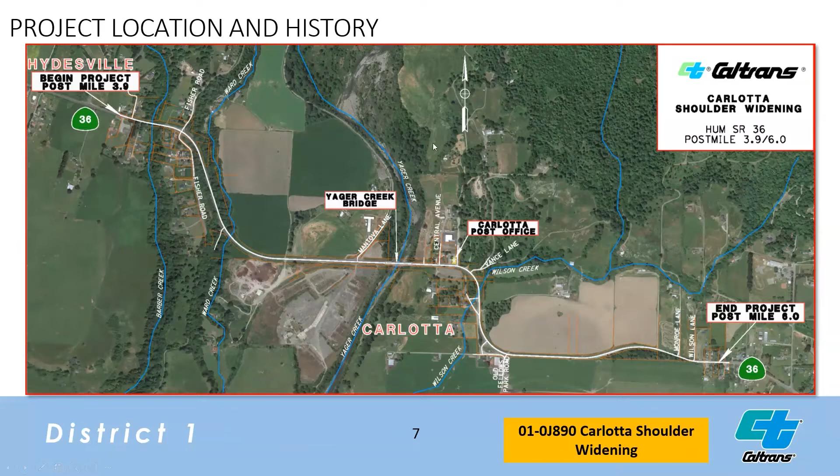Now, this project was initiated as a response to a traffic investigation report that was sent by headquarters in Sacramento, Caltrans, and we monitor all roads through the state of California. This segment of highway was identified as having a higher rate of collisions than the statewide average. So this came up, flagged our report, and we go to our traffic safety folks here in Eureka, and we go out and investigate this. So this was an investigation report.

The purpose of our project is to reduce the frequency and severity of collisions. This is more of a proactive approach. Historically, Caltrans has been in the safety world a little bit more reactive, but we are looking at things and projecting what we think will happen. So we are trying to save lives and go to zero fatalities with our mission.

Right now, our program construction cost for all what we present is about $16 million. If you can please go ahead.

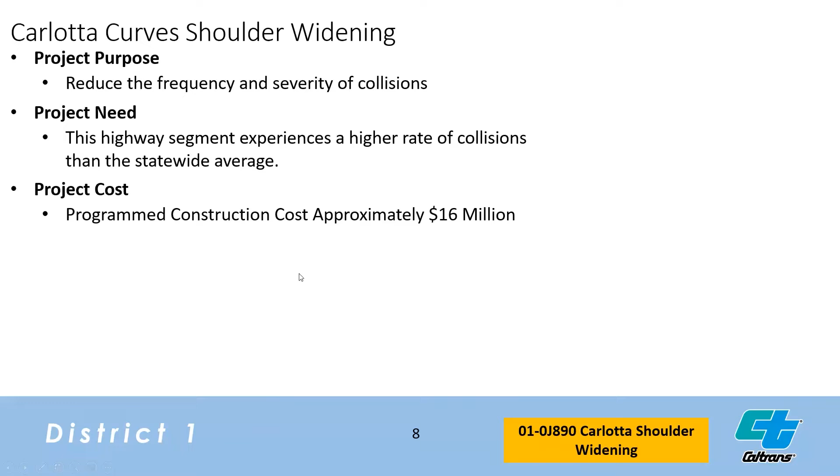So this is where we're at. We are in September of 2022. We are somewhere kind of almost at the midpoint of our studies. So we have some preliminary concepts of design, what we want to do to make this corridor safer. We are looking at having to do the required environmental studies. So we're there, and we are here to present our concept to the community.

We live, and we want to make sure that we hear your voice and get your comments. We basically modify our designs a lot of times based on what a community comment is, because you know best, because you are the users of the facility.

Our end of environmental phase for the complete final document and final project report, which is where we decide this is what we're going to do, is going to be next spring, in 2023. We hope to start construction in summer of 2024, and it's going to be a 2-season job ending December 2026, most of it your standard construction. We will go through that a little bit. Right now, it's still in the development phase.

If you can move to the next slide. Okay, I'd like to introduce Brian Simon, who's our branch chief. What we're going to do is have him and Desiree do the presentation on what the design elements are, and then we'll go to the next folks. So thank you, I will turn it over to you.

Thanks, Marie. Can you guys hear me okay? Can you hear Marie speak over here? We can move the chairs closer if you guys want to get closer. Desiree's going to be doing some more speaking as well, doing kind of an overview of the project.

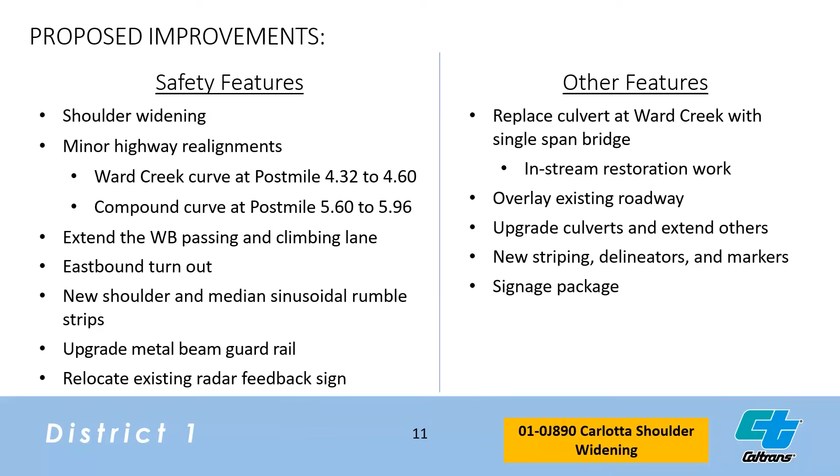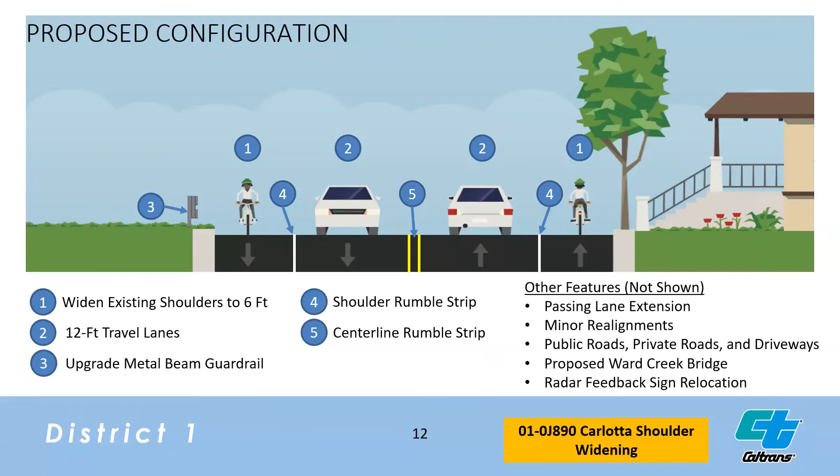We will be doing the 6 feet shoulders. We'll have 12 feet driving lanes, the upgrading of the metal beam guardrail, and where the rumble strips will be located at. Here's an overview of the map, but instead it's now divided into 8 sheets.

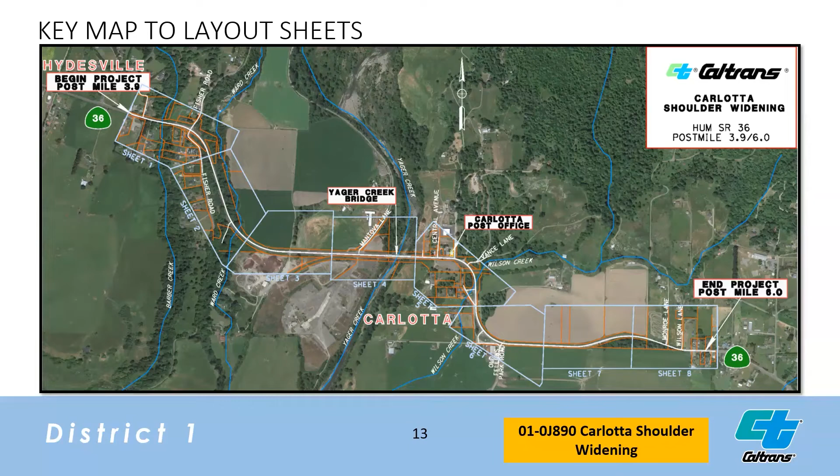I'm going to go fairly quickly through each of these 8 sheets on the upcoming slides. These sheets will show the preliminary proposed design, safety features such as widening, overlay, guardrail, and rumble strip locations, which are all subject to change as design fine-tunes our proposed design that we have here. Please note which sheet numbers you may be interested in, as these slides will be available to look at during the questioning and answering part of our presentation.

Here we are on sheet 1, and I just want to note the legend that you're seeing on the left. There are going to be 5 features that will pop up on the screen. It won't be super noticeable, but I'll try to go slow enough for you guys to see it as it goes through. The widening will be more of a thin blue area. You'll have a gray area that will pop up showing where we're overlaying, and then where the 2 locations of realignments are throughout this project, where rumble strip is, and where guardrail upgrades or new proposed segments will be.

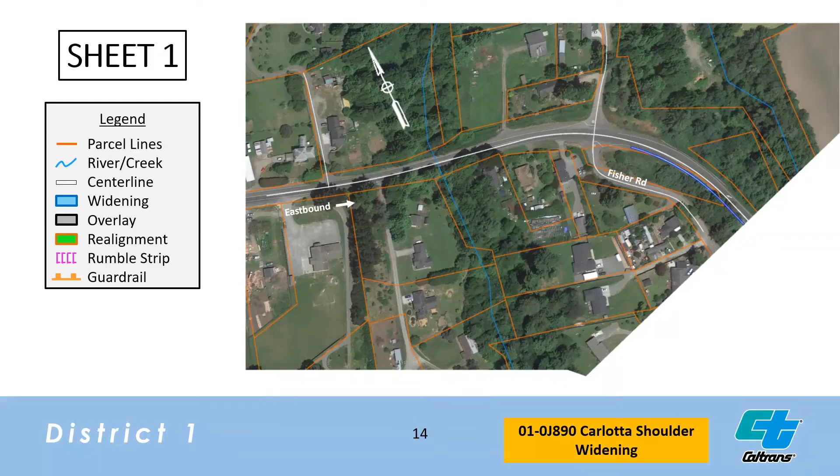Here we're going to start off with the widening area, the overlay, and guardrail. Now we are on to sheet 2.

I got a spinny wheel. Hold on. There we go, it worked.

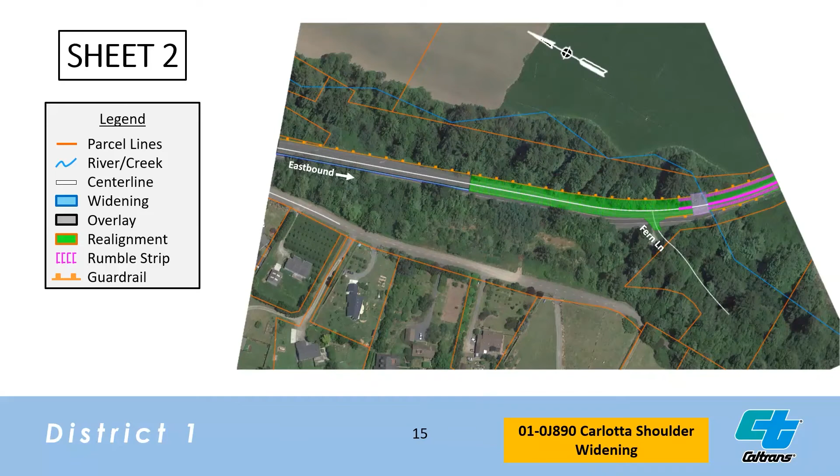Overlay, the beginning part of the first realignment area, proposed rumble strip, guardrail, the beginning of the passing lane—but this is also the end of the passing lane depending on how you want to view this. For presentation purposes, I'm calling it the beginning of the passing lane since I'll be going backwards from here. And where the Ward Creek Bridge is being proposed.

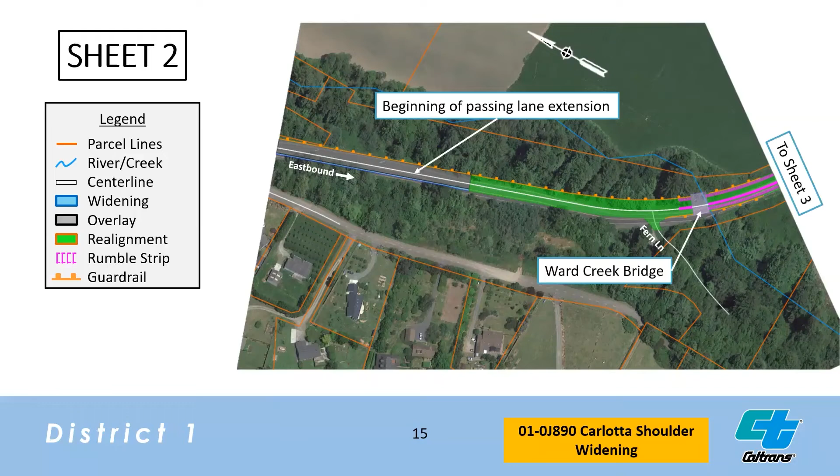Now we're on to sheet 3. Overlay. The rest of that realignment, the first one. Rumble strip.

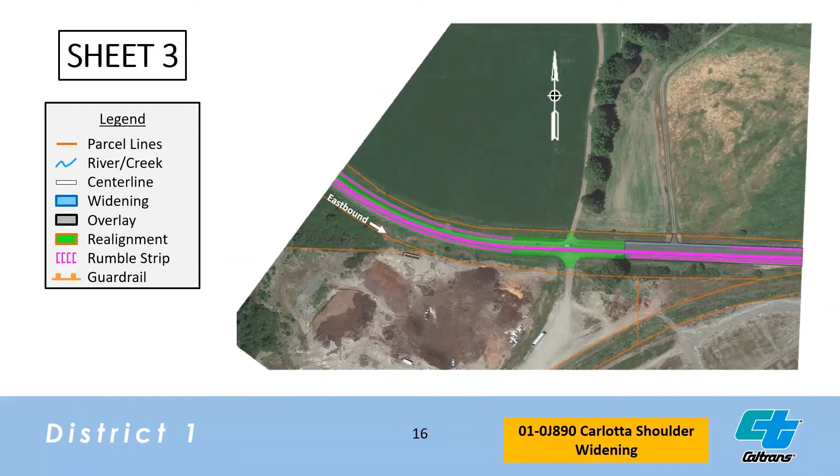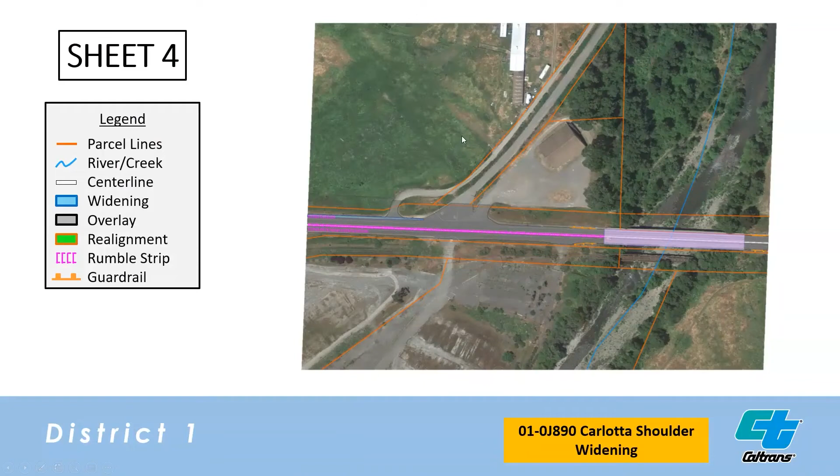Now we are on to sheet 4. Widening. Overlay. Rumble strip. And the end of the passing lane.

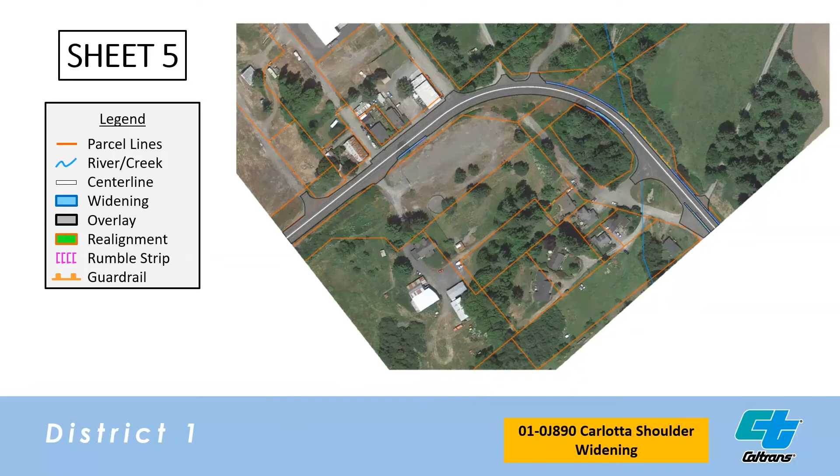Sheet 5. Widening areas. Overlay. Guardrail. Sheet 6.

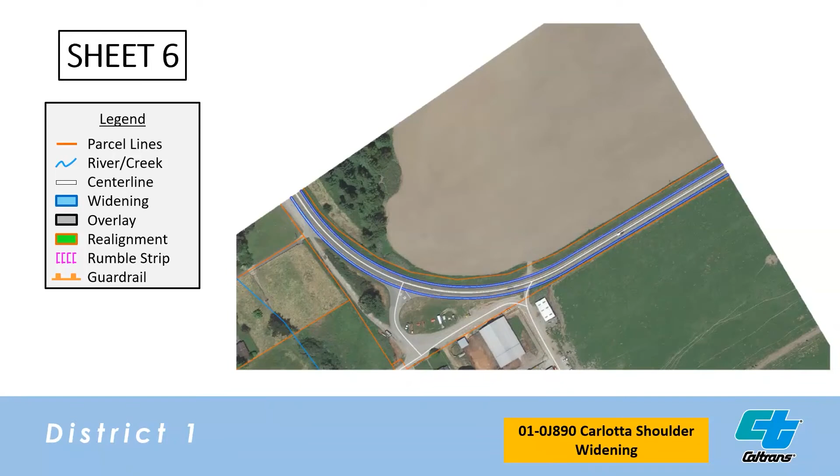It doesn't like my widening every time here. Sorry guys. Widening. Overlay. Rumble strip.

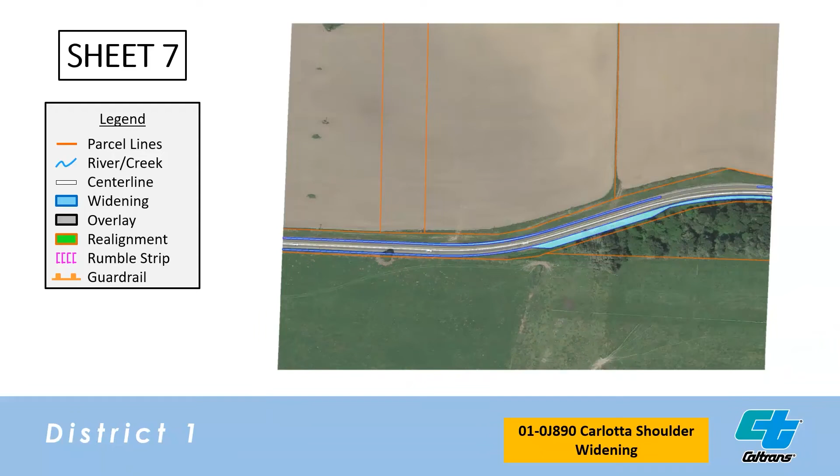Sheet 7. Working on the widening here. Overlay. Where the second realignment will be occurring. Rumble strip. And the eastbound turnout.

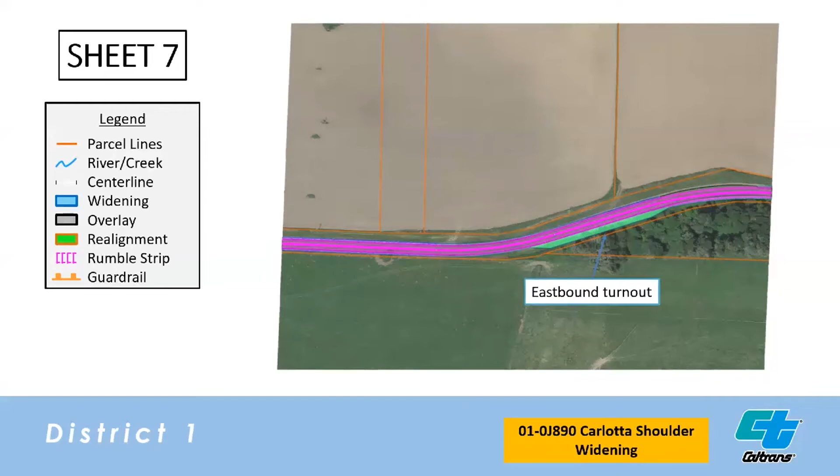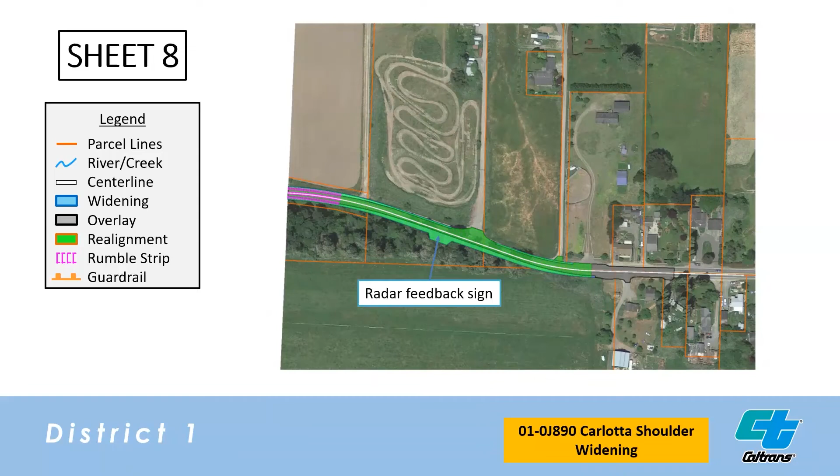Sheet 8. Widening. Overlay. The rest of the realignment area. Rumble strip. And where the radar feedback sign will be relocated.

In the culvert below the roadway at Ward Creek, the creek will be restored, and in the environmental portion of this presentation we'll be discussing this restoration work in a little bit more detail.

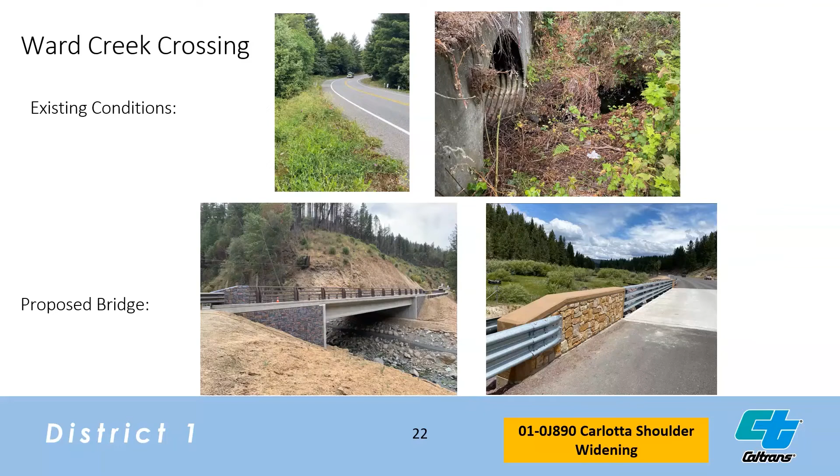The 6-foot-tall elliptical corrugated steel pipe will be replaced with a pile-driven single-span concrete bridge with a vehicle and bicycle steel railing. The bottom photos are examples of how the bridge may look when finished. The railing will be attached to a decorative transition end block, similar to what is being shown here.

I'm now going to discuss our reconstruction strategy, starting with the 2 minor realignments. The first realignment will be occurring at Ward Creek curve, which is the curve just east heading towards Carlotta from Fisher Road intersection. This was shown on sheets 2 and 3.

This area will be reconstructed fully. Center line will be shifted slightly to the north. Curve radius and the super elevation, or the cross slope, will be improved from existing conditions. The new profile of the roadway will be adjusted to accommodate the new single-span bridge at Ward Creek.

The second realignment is occurring on sheets 7 and 8. The existing compound curve will be removed and the center line will be shifted slightly to the south. This portion of the roadway will not be reconstructed, but rather widened as necessary and paved to match existing cross slopes of the roadway.

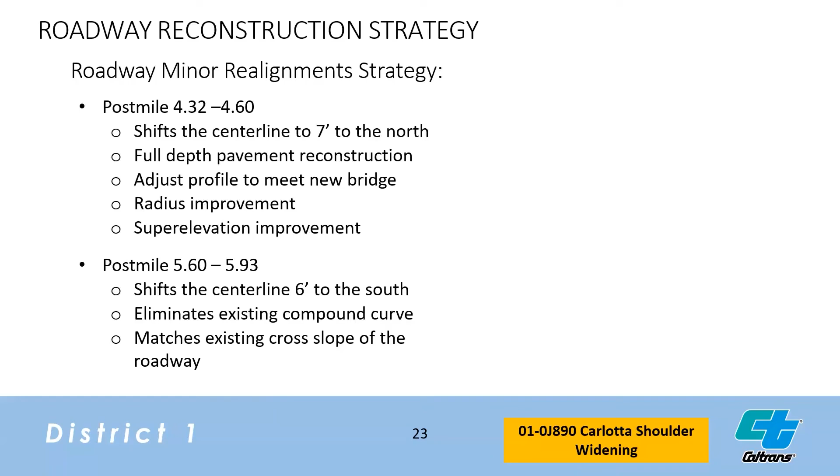The next part I'm going to discuss is our pavement and construction strategy. The overall pavement strategy will consist of widening. We'll saw cut along the existing edge of pavement and widen with new structural materials. We'll do pavement repairs as needed.

We'll also cold plane where areas need to conform into the existing pavements and as needed to maintain the existing cross slopes. And lastly, we'll do an edge-to-edge overlay, which will include the newly widened area. This overlay will maintain the integrity of the existing roadway and provide a refreshed surface ready for the new striping to be laid down.

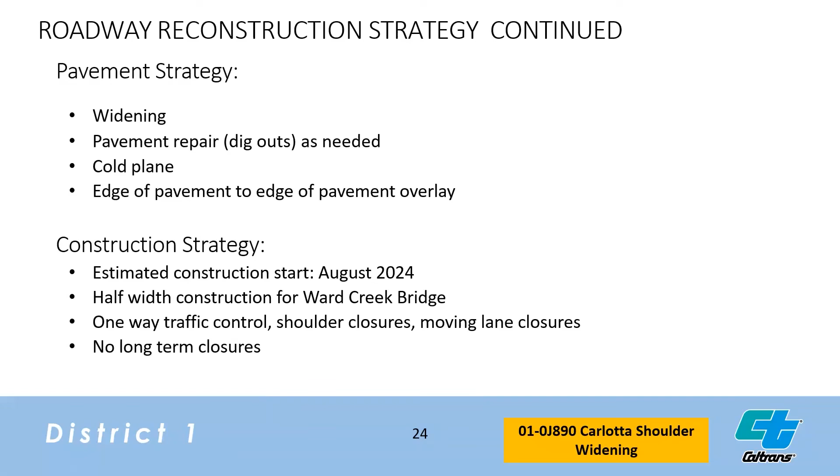The overall construction strategy will begin in August of 2024. Ward Creek Bridge will be built with half-width construction, utilizing a portable traffic signal. The rest of the work will be a combination of one-way traffic control, shoulder closures, and moving lane closures. There is no anticipated long-term closures for this project.

Now I'm going to start my part of the presentation off with the general right-of-way process that will be occurring. First, I'll go over the deeds and maps and the differences between the two. Maps show the land and the improvements, and the deeds are the legal descriptions that go along with that.

Appraisals will ensure that those lands that are acquired are done so at fair market value. An acquisition branch gets involved to ensure timely securing of property rights for the project while also adhering to the Uniform Relocation Assistance and Real Property Acquisition Policies Act.

There will be utility relocations in this job as they are in conflict with the widening that is occurring. We do also have Greta from Right of Way here available to answer any general questions you may have on this process. Next, we are going to move on to our environmental planner coordinator, who's going to present the environmental portion of this presentation.

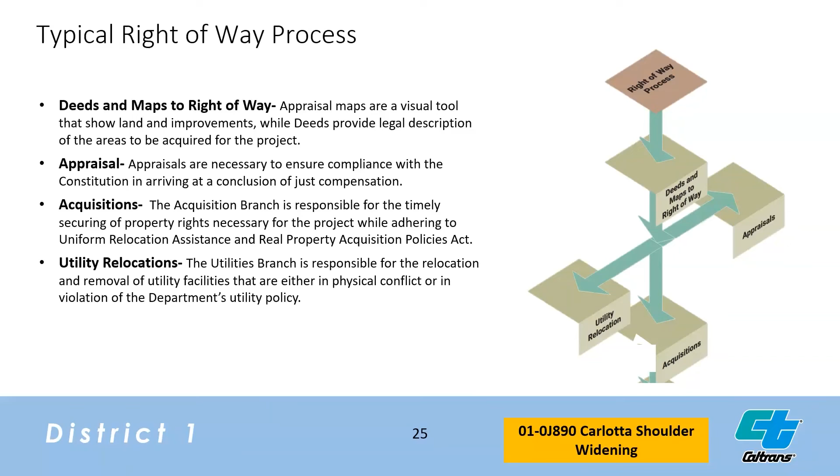Hi everyone, I'm Carrie Williams, and I am the environmental coordinator and planner for this project.

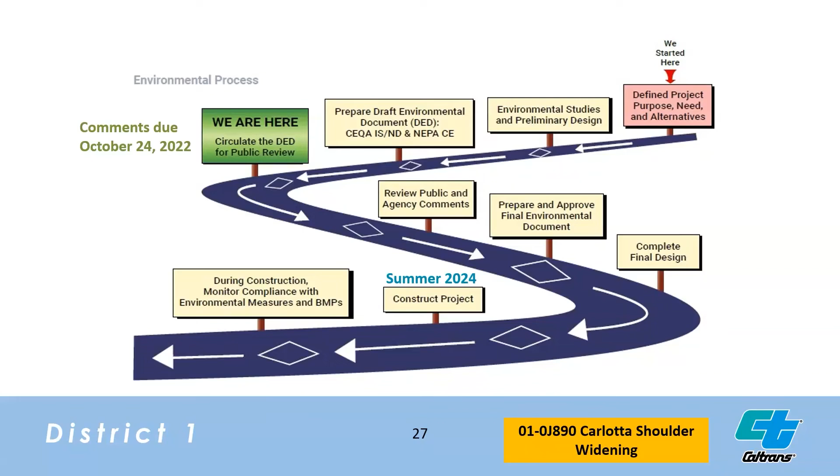Environmental involvement continues during construction, where we will monitor construction activities for compliance with the environmental measures that are part of the project. Caltrans is required to comply with all state and federal environmental laws, regulations, and policies. The two that are most relevant to this stage of the environmental process are CEQA, the state level act, and NEPA, the federal level act.

Under state law, the type of document prepared for this project is an initial study and proposed mitigated negative declaration. It's a lot of acronyms. The draft of this document is what has recently circulated, and that's what we'd like your comments on. Under federal law, the project qualifies for a categorical exclusion.

The environmental review process for the Carlotta Shoulder Widening Project has found that the project would have no significant impacts on the environment. Mitigation would be required for minor impacts to wetlands. Caltrans anticipates applying for permits and approvals for this project from our partner state and federal agencies, such as the U.S. Fish and Wildlife Service, the National Marine Fisheries Service, the California Department of Fish and Wildlife, the U.S. Army Corps of Engineers, and the North Coast Water Board.

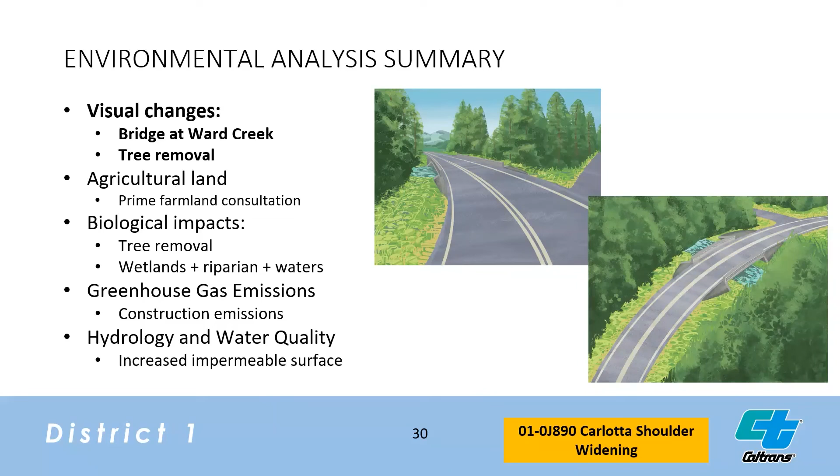We expect that 2 mid-sized redwood trees would be removed on the northwest corner of the Ward Creek crossing to make room for the new bridge abutments. All of the removed trees would be replanted on site. Additionally, approximately 5 black cottonwood trees would be removed towards the east end of the project near Monroe Lane to make room for the curve improvement and the widened shoulder. The next topic I'd like to discuss is agricultural land.

Caltrans completed prime farmland consultations with the County of Humboldt and the U.S. Department of Agriculture. We reviewed a map showing where farmland of statewide importance and prime farmland are located within the project boundaries. Both agencies agreed there would be no significant impact to prime farmland or farmland of statewide importance as a result of the proposed project.

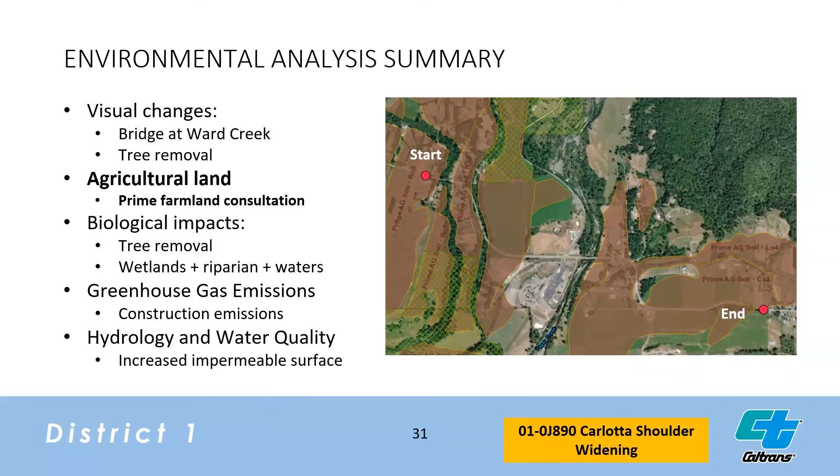The narrow slivers of land shown in blue that are proposed for acquisition to build the widened shoulders are mostly areas zoned and designated as agricultural, but not actively farmed. None of this land is under the Williamson Act contract.

We'll move on to the biological impacts anticipated from this project. The majority of the 2.1-mile project proposal would have minimal biological impacts. A small wetland on the northeast corner of Ward Creek, approximately 1/10 of an acre, would be impacted by building the new bridge. Mitigation credits would be purchased from the 2020 Fen Co-op agreement, which would protect a portion of a very special nearby fen bog wetland in perpetuity.

This bridge was part of a previous Route 36 alignment and was abandoned prior to 1970 on private property. Due to frequent trespassing, graffiti, garbage dumping, and other activities at this location, there would be multiple benefits to its removal, including offsetting any impacts to riparian vegetation or waters.

Creek restoration needs would be evaluated by restoration experts, but may include stream grading, riparian plantings, and adding portions of the cut redwoods as large woody debris for in-stream habitat.

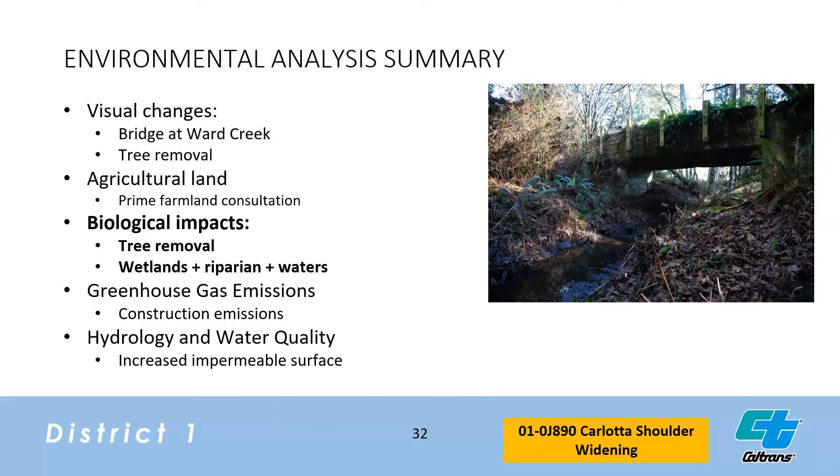We'd also like to discuss the benefits to wildlife that we expect from this project. The existing culvert was identified as a fish passage barrier, so building a full span bridge over Ward Creek would provide a solution to the fish passage issue.

This culvert, while hidden from view to most drivers, is a highway itself for critters in the area. Our biologists set up game cameras at the culvert for the last few seasons and caught many species using it to pass under the road. So far, we've seen a bobcat, a wood rat, a skunk, and more to come.

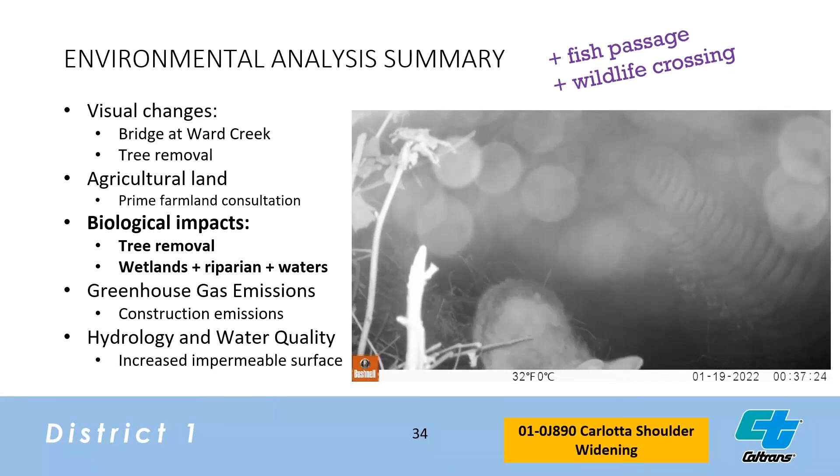The last two subject areas that Caltrans addressed in depth in our environmental document are greenhouse gas emissions and hydrology and water quality. This project would not produce a permanent or ongoing increase in greenhouse gas emissions because it would not add vehicle capacity or induce growth to the area. New sources of greenhouse gas emissions would be from construction only.

Hydrology in the area may be altered slightly due to increased pavement areas, which would increase impermeable surface from the widened shoulders. To offset this, Caltrans plans to build bioswales that would filter roadway runoff before stormwater made it into nearby drainages. Due to this and to Caltrans standard measures and best management practices, we do not expect water quality in the area to be impacted.